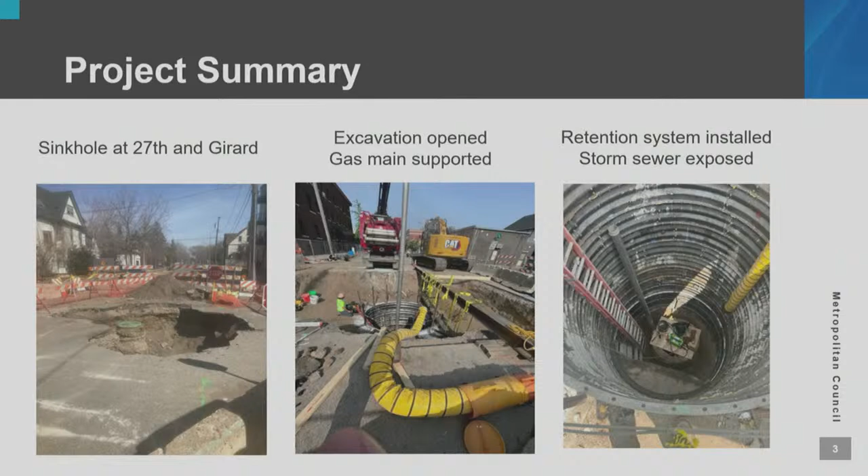Once that concrete saddle was poured and cured, we were able to construct a fiberglass manhole on top of that pipe, supported by that saddle. Then we backfilled to the elevation where the city's sanitary sewer connection was located, about 16 feet below ground.

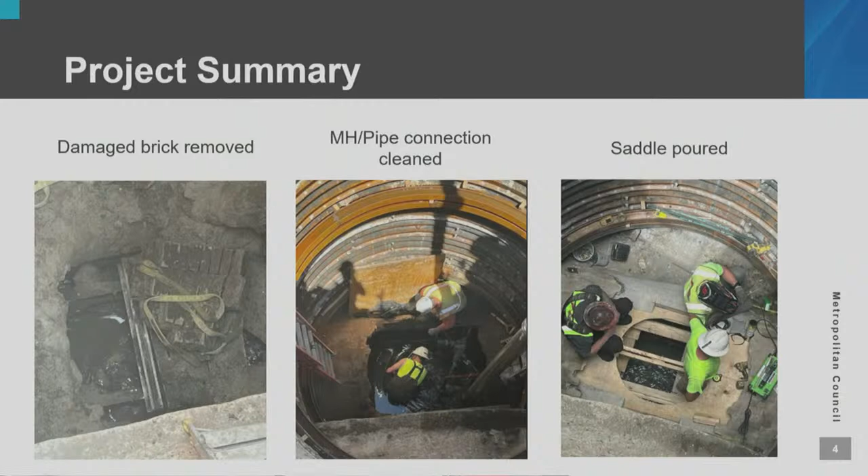To summarize the repair scope and the estimate, the work includes engineering services to support the repair work. We needed people to design the manhole itself to support traffic loads, and a structural engineer to design the reinforcement for the concrete saddle that was placed. We were also looking for costs for excavation and the maintenance hole structure itself, and reconstruction of the maintenance hole.

Initially, we expected that the cost would be around $350,000, and that's what our initial emergency declaration covered. But as you could see from some of our pictures, there were a lot of other things we bumped into as we were putting this pipe into the ground, which increased the costs as we moved forward. Final total time and material costs for this project is approximately $430,000, so an additional $80,000 needs to be authorized to cover the actual costs of the emergency repairs.

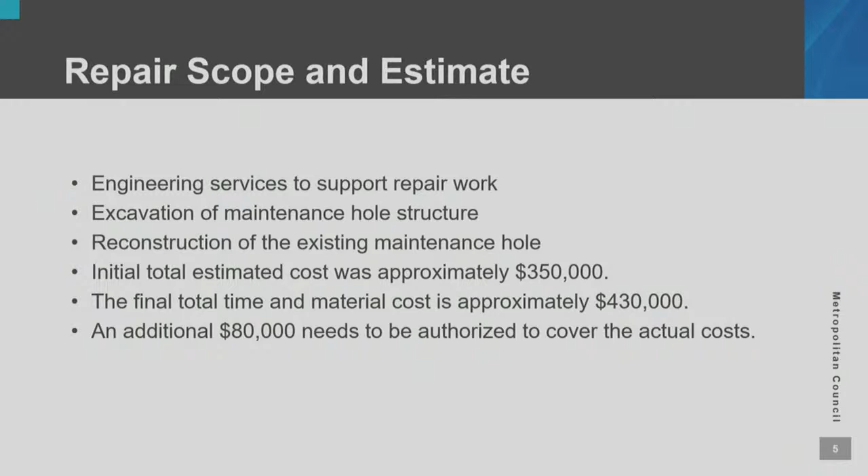Our proposed action is that the Metropolitan Council revise Emergency Declaration 2023-103 for the repairs of the maintenance hole for Interceptor 1MN330 at 27th Street West and Girard Avenue South in Minneapolis, from an estimated $350,000 to an amount not to exceed $430,000.

With that, I'm available for questions. Questions for Mr. Wedin? Yes, please.

Thank you, Mr. Chair. I know whenever you start digging, you find surprises, so it's not surprising that you're coming back with an additional fund. Could you let us know how long it took time-wise from when it was first observed to completion? Because I know it's very complex with that gas line there and the storm sewer, and you have to be so careful with everything. I think it looks like you guys did a fantastic job, but just the total time it took.

Mr. Chair and council members, as I recall, the initial emergency declaration was issued around April or May of this year. That's about when we issued that initial emergency declaration, in the spring of the year. Looking through records, I was seeing work still being completed in about August of this year, so it did take us some time to get that repaired. Some of that is because of supply chain requirements—getting a new fiberglass manhole into that location takes time. It's not something we can get off a shelf somewhere; it had to be manufactured.

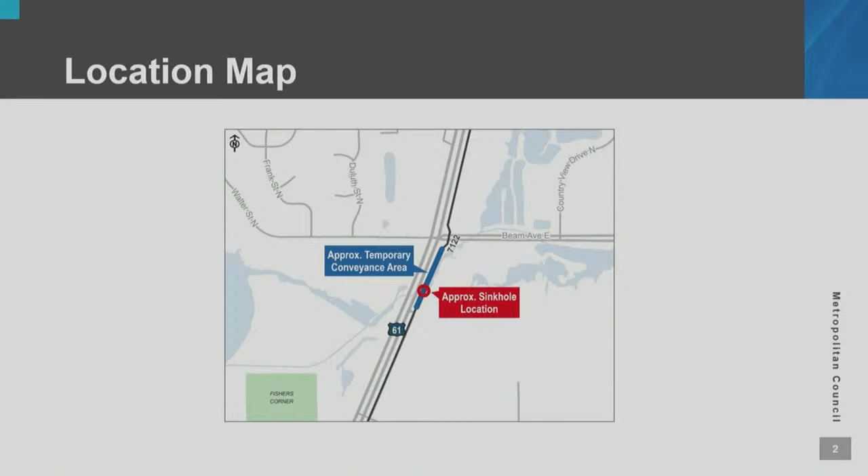Since then, we've televised and cleaned the pipe, and I was on the phone just an hour ago with crews. They've made a man entry into the low flow, or the low head crossing, and have been trying to locate where the hole is in the pipe. They've grouted above that hole to try to stop the inflow of more groundwater and water into that hole. They've tried cleaning, but the top of the low flow structure is very badly corroded and they were unable to clean it much. The word I got back was their wire brush was actually going right through the pipe.

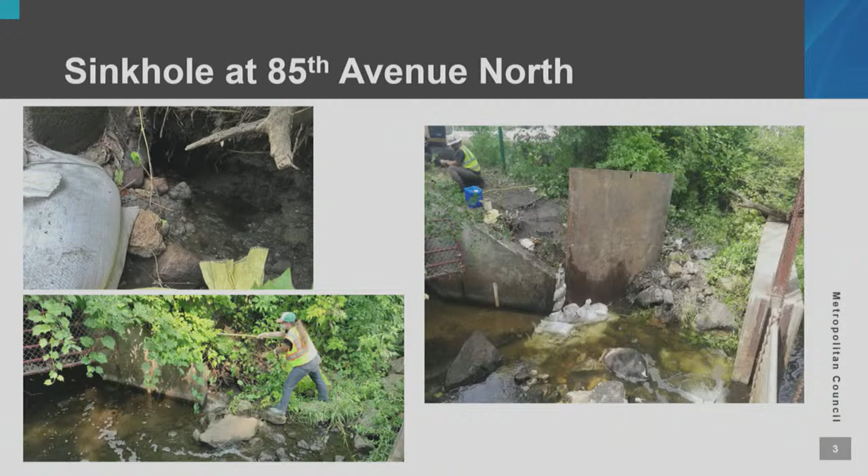One of the things about the cost, when we put together an emergency deck, we literally have hours to put that together. One of the things I recognized was that this pipe, which services the whole northeast region, all the way up to Forest Lake, we have about 4.5 million gallons a day on a dry weather flow, average flow that comes through the system.

So the temporary conveyance is not a small feat and would be costly. So we're going to try to repair the pipes while we have that item set up.

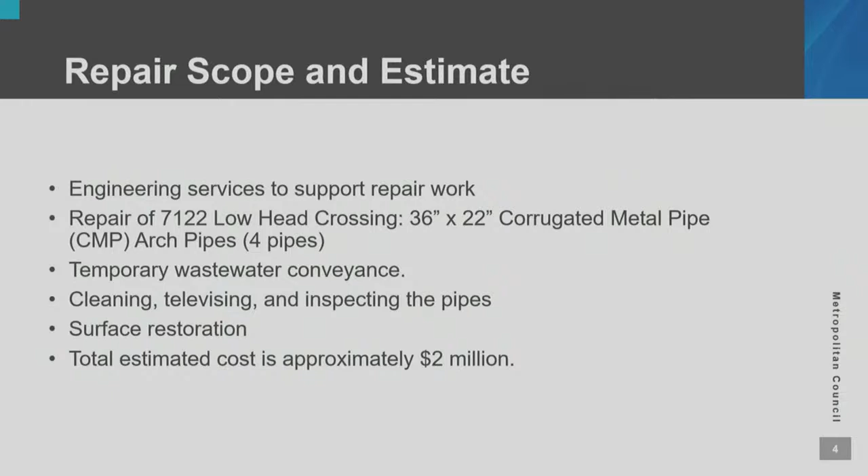And with that, our proposed action for tonight is that the Metropolitan Council ratify the attached emergency declaration for repairs of the sinkhole and Interceptor 7122 low head crossing in an amount not to exceed $2 million. And with that, I'm sure you'll have questions.

I have one. Does it make sense to do a cured in place on corrugated metal pipes that are almost 50 years old as opposed to just replacing them entirely? I don't know that cured in place, it kind of makes a new pipe in and of itself, but is that more cost effective? I imagine it's more cost effective than getting an entirely new pipe. But yeah, what do you think about that?

Mr. Chair, there's been many phone calls in the last 2 days to just talk about this particular subject, waiting to find out from field staff in particular just what the conditions of the pipe are, can the pipe persist until we get a capital project in place to do the full repair.

And hearing back that the crown of that pipe, and I wish I had pictures, I do have pictures now of the crown of the pipe, that it's perforated all the way through the length of the pipe, and there's water that's now seeping in other places other than the first sinkhole that we have. The fact that they can basically peel it away with a wire brush, meaning that it's basically soils and the culvert above that are holding everything up in the air.

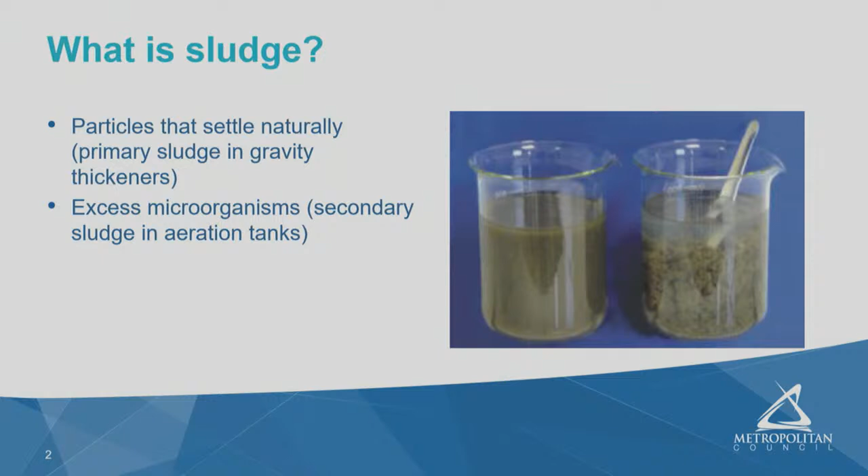I work in process engineering, R&D, and air quality under operations support services. Polymer is used as a conditioning chemical to treat the sludge generated at a wastewater plant. Sludge is the word for the solids generated at a wastewater plant. Sludge at Empire comes from 2 sources: primary sludge, when the raw wastewater is allowed to settle and solids settle out, and secondary sludge, where we waste a certain amount of microorganisms continuously to maintain a healthy biological population to remove nutrients in our activated sludge aeration tanks.

Polymer is mixed with that sludge, and the picture shows the beaker on your left is sludge without polymer, kind of evenly mixed in there with the solids. The picture on the right is polymer mixed with that sludge, and you can see the water starting to form on the top and sludge starting to settle on the bottom.

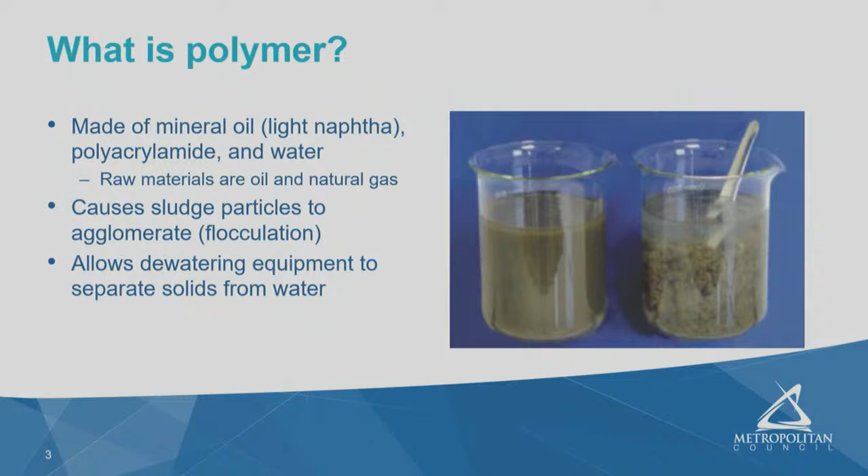The product that we would be purchasing is made of mineral oil, polyacrylamide, and water in a liquid emulsion. It causes the solid particles to stick together, or flocculate, and then the water can more easily separate out.

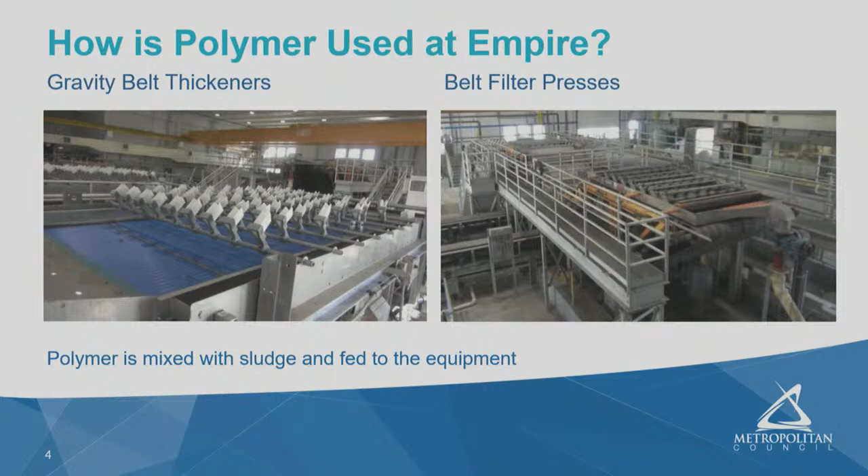We use this polymer on two different pieces of solids processing equipment: the gravity belt thickeners and the belt filter presses. These are mechanical sludge treatment equipment, and the same polymer is used for both.

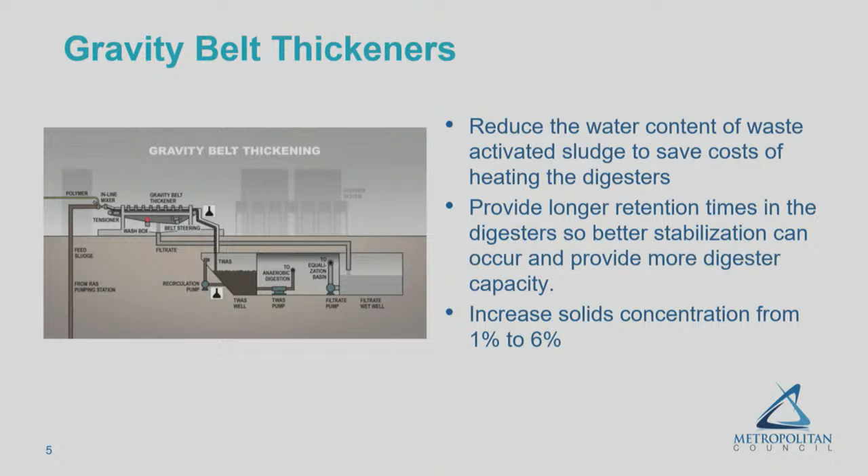For the gravity belt thickeners, here's an illustration of how it works. This is used on waste-activated sludge, those microorganisms, and the sludge gets mixed with polymer and then fed onto a moving belt. The water flows down through the belt and the sludge stays on top, getting thicker and thicker until it's at a concentration of about 6% solids, where it's appropriate to be sent to anaerobic digestion. Then it's called thickened waste-activated sludge, or TWAS.

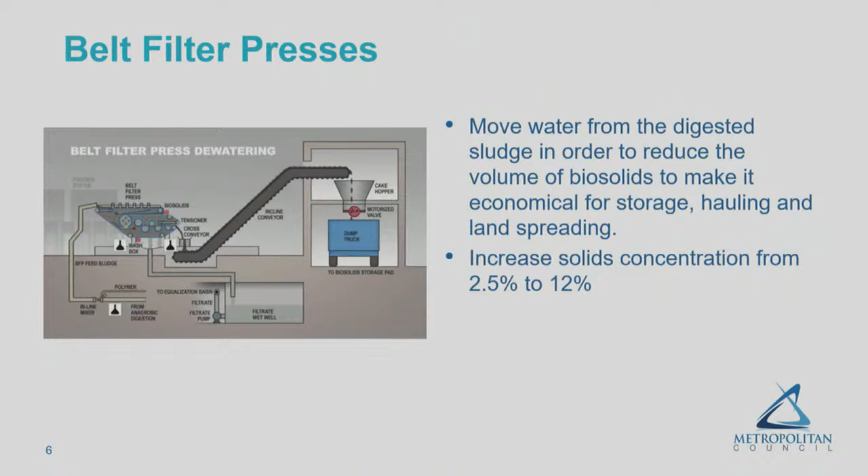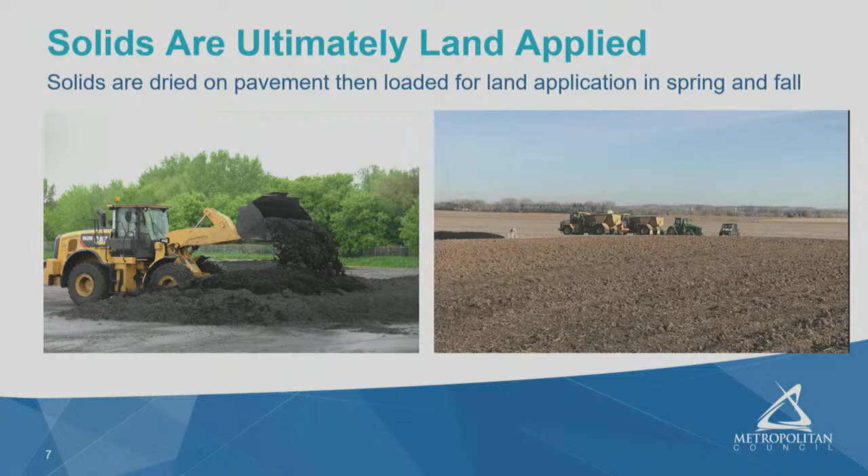At the Empire plant, solids are ultimately land applied. First they're sent to a pad where they can dry a little bit more outside, and then they are land applied on agricultural fields.

To procure this chemical, we went through a two-step process. First, we did an invitation for pre-qualification starting in December, allowing manufacturers to bring their chemical and test it full scale on these pieces of equipment. The products that met our specifications and worked well with the equipment were allowed to bid.

We put out the invitation for bids on July 10th and received bids from 3 different companies, which were opened on August 10th. Polydyne Inc. was determined to be the lowest responsive, responsible bidder and met qualifications.

So over 5 years, we expect to spend about $2.4 million on polymer. The Office of Equity and Equal Opportunity did not set an MCUB goal for this contract.

The proposed action is that the Metropolitan Council authorize the regional administrator to award and execute contract 22P349A with Polydyne Inc. to provide polymer to the Empire Wastewater Treatment Plant in an amount not to exceed $2,399,000.

Thanks. Thank you. Questions for Ms. Schrandt? Please. Thank you, Mr. Chair. I thought it was really interesting that you let them come in and actually test their chemicals on the plant, because, wow, that's such a great idea to do that.

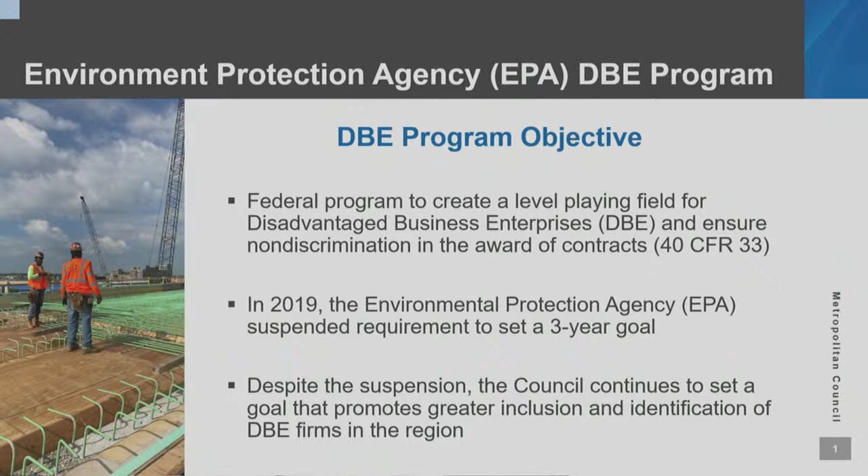As background, the federal program to create a level playing field for disadvantaged business enterprises is called the Disadvantaged Business Enterprise Program. In 2019, the Environmental Protection Agency suspended the requirement to set a 3-year goal. However, in the interest of transparency, accountability, and consistency, we operate our EPA DBE goal in accordance with 49 CFR Part 26, the same regulations that govern our FTA DBE goal. The overall goal represents the anticipated DBE participation based on projected expenditures over a 3-year period, and it is applied and measured each fiscal year. The overall goal is not a quota - it's a goal, and we do our best efforts to meet it each year.

One requirement of the goal methodology is that the maximum feasible portion must be achieved using race and gender neutral means - meaning instances where you don't establish a goal on a project. We count race and gender neutral participation where there is no goal established on a project but we still get DBE participation, and also on projects where we have established a goal but achieve a higher percentage than required to meet it.

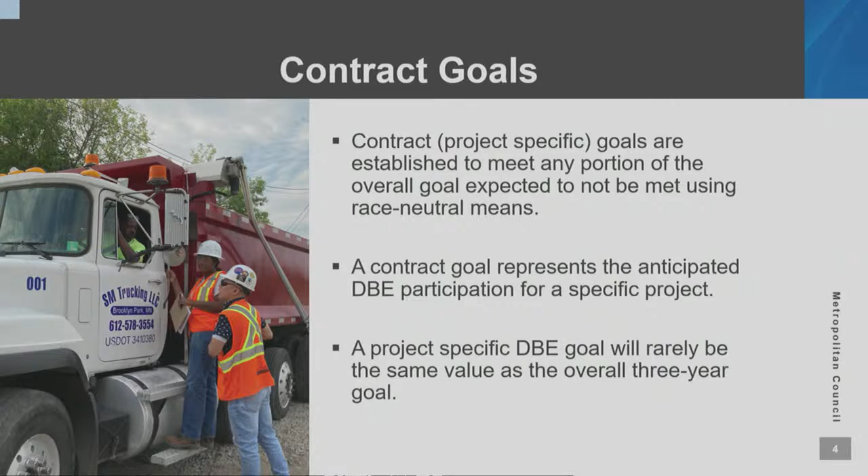The mechanisms we utilize to achieve our overall goal include setting contract-specific goals, and we have contract specifications that outline the process of how we do that, how we measure, and how we count it. A project goal is probably rarely or never equal to the overall goal because it is project-specific and based on those factors and availability of DBEs to do the work.

So the proposed goal for our next 3 years, 2024 through 2026, is 11.9%, with a race-conscious portion being 5.4% and a race and gender-neutral portion being 6.5%. What jumps out, other than the overall goal, is that it's rare to see the race and gender-neutral portion higher than the race-conscious portion. However, that is due to a couple of factors - we had a high percentage of projects where we got race and gender-neutral participation, either where we didn't set a goal but still achieved DBE participation, or DBE participation that exceeded the established goal.

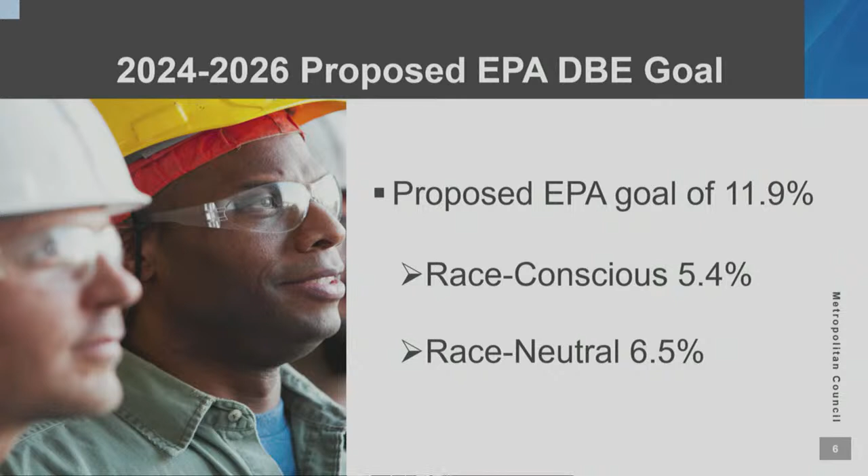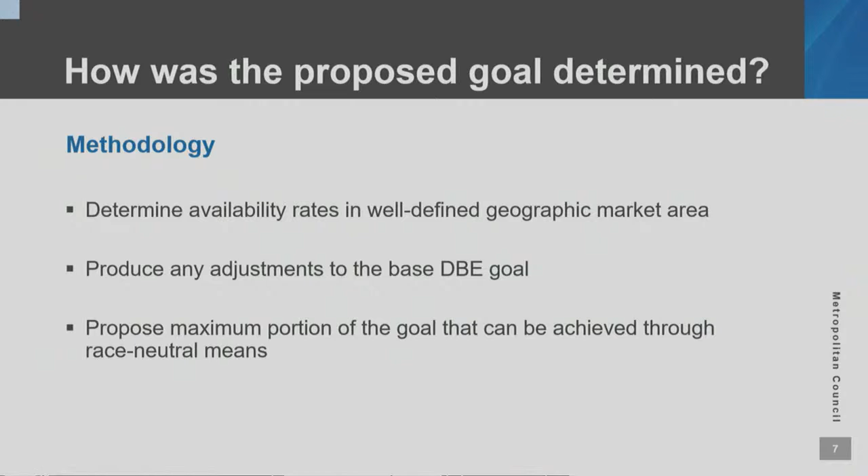So the methodology used is you have to determine the availability rates in a well-defined geographic market area, and then produce any adjustments to the base DBE goal, and propose the maximum proportion that can be achieved using race and gender neutral methods. This is the first time in the council's history we used a third-party outside consultant to conduct our methodology. This creates a level of objectivity and transparency, and we received feedback from the vendor community and our equity advisory committee that this is a best practice.

One of the things they were concerned about was the limited amount of data in some of these proposed methods. Using the 5 methods would compute a goal of 25.6%, including the adjustment and historical data. Ultimately, we chose option number 4, utilizing the 3 methods with the adjustment, due to the limited amount of data and information from the other 2 methods.

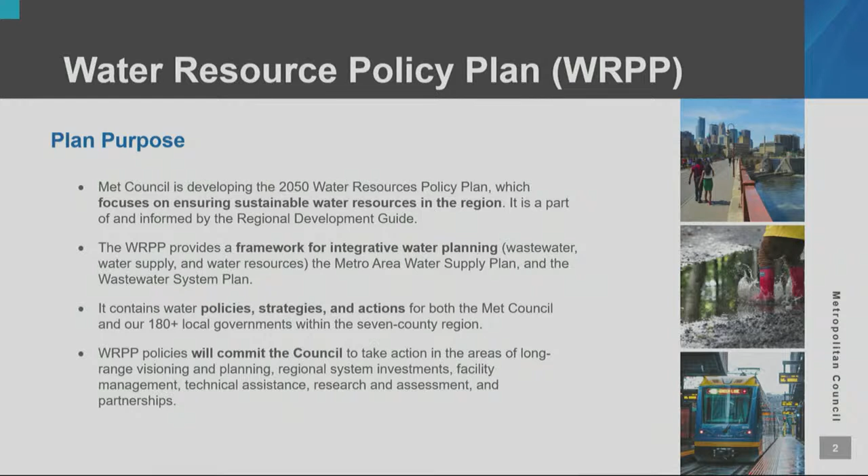This plan will commit the council to take action in the areas of long-range visioning and planning, regional system investments, facility management, technical assistance, research and assessment, and partnership. So there's a lot in there.

I do want to give a little insight into when the authoring teams create the papers, we also share them with our water advisory group, which is an advisory group made of 21 local water professionals from the region. We have 7 focused more on the municipal wastewater system, 7 members focused more on regional water supply, and then 7 watershed administrators. With their help and input, that helps to guide the contents of our papers.

I want to reassure you and frame that we are doing engagement with these papers. When you read these papers, it is a lot of what the council's perspective is, but we have engaged with locals to ensure that we're bringing some of that local perspective through.

That being said, these are papers that are to start discussion. And even with those 21 advisors, we still miss things. So that's why we're coming to you to get your perspective and to engage with that discussion as well. Pushing it all into one box is just not fair to the process, so I wanted to share a little bit more insight into what that process was.

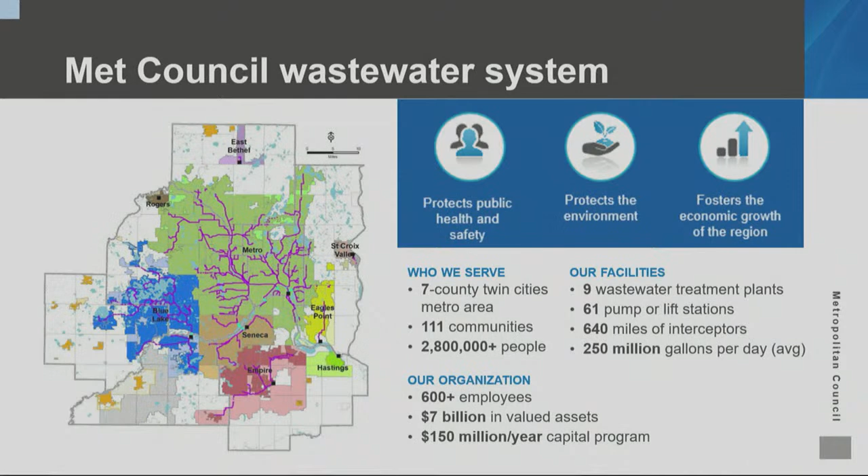There are many topics are you laughing at our slide?

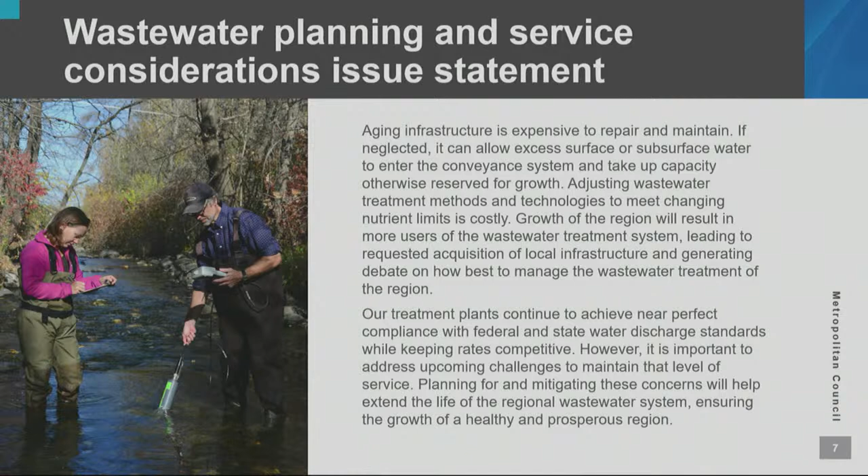There's a lot of topics we could discuss regarding wastewater planning and service considerations. We have our issue statement on the screen. I won't read it, it's quite long, but some of the topics it addresses include aging infrastructure, wastewater treatment for various contaminants, system capacity, and how we plan for growth. You can reference this at another time.

These key messages are really important, and we wrote these after writing the paper as kind of the highlights and blurbs that summarize our commitments and what's in this paper. I won't read them, but I do ask that after the meeting you read them and share them, because these are our goals for this paper.

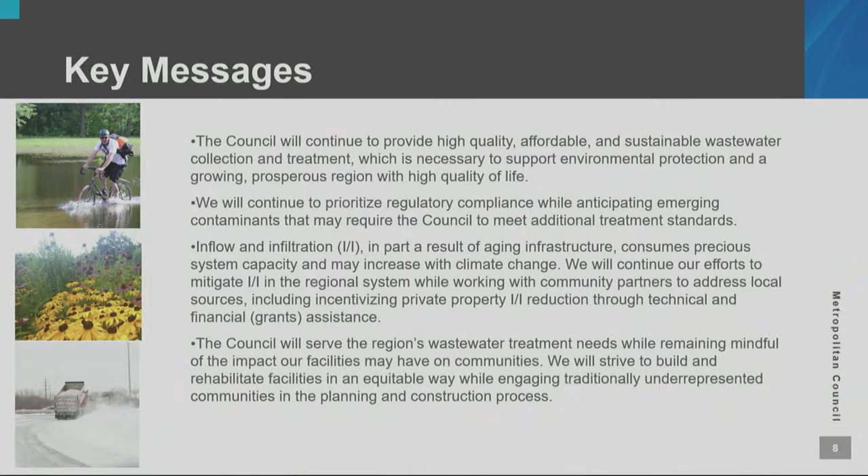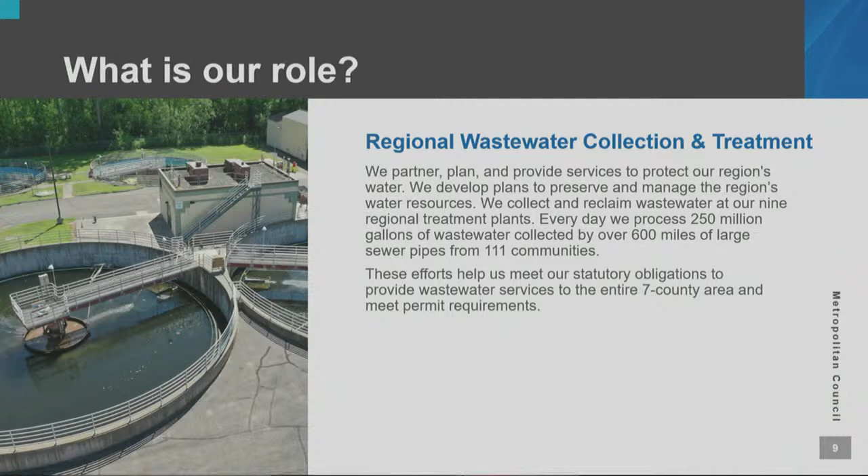Our role in regional wastewater collection and treatment, I mentioned this earlier, but wastewater treatment is addressed in council statute. So we partner, plan, and provide services to protect our region's water, and we preserve and manage water resources, collect and reclaim wastewater, all to serve our region and meet our statutory obligations.

Now into the key issues of this paper. We highlighted 7 issues. It's not an exhaustive list of concerns or considerations for the policy plan. As with all the other research paper topics, items not addressed in these papers are not excluded from being incorporated into the 2050 water policy plan.

I will start by just providing some details on a few of these issues, and then for more complete information, I'll direct you to the research paper.

As a quick refresher, inflow and infiltration is the clear water, so storm and groundwater that enters the wastewater conveyance and treatment system. It can enter from cracks or breaks in the sewer pipes as well as direct connections.

The Met Council and our local communities have invested millions of dollars into repair and rehabilitation of wastewater infrastructure to remove I&I from the system, and it has been successful. We've been able to defer capacity improvements estimated at $1 billion thanks to the hard work on I&I mitigation. The growth of the region has also been accommodated without needing system expansion because we are removing this clear water from the system. The low-hanging fruit of public infrastructure mitigation has been targeted over the years.

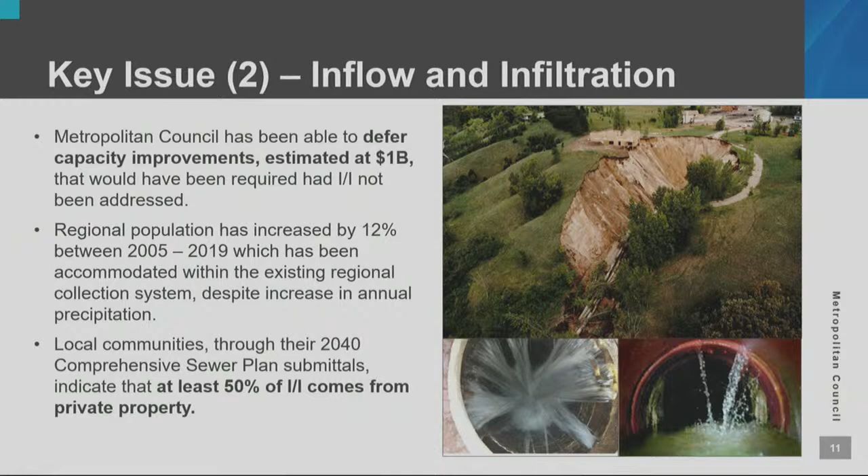Another issue I'd like to highlight that's in the paper is related to our liquid and Vactor waste receiving sites. As a quick definition, liquid waste includes domestic waste, so that's like septage, holding tank, portable toilets, grease trap, etc., and some industrial waste. And Vactor waste includes the solids that are removed from the sanitary sewer facilities, most often during cleaning operations. So Vactor waste has grit, sludge, fats, oils, grease, rags, etc.

So since then, we have heard concerns from liquid waste haulers about the decreasing number of sites. Vactor waste, on the other hand, can only be disposed of at the Metro plant in St. Paul. Concerns arise during flood conditions when the Metro plant is inaccessible.

So some implications of closed disposal sites include not meeting our customer needs for waste disposal and treatment, Vactor waste being disposed of in other areas of the collection system that aren't meant to handle that type of waste, and a need for environmental services to have agreements with other cities for disposal during flood conditions.

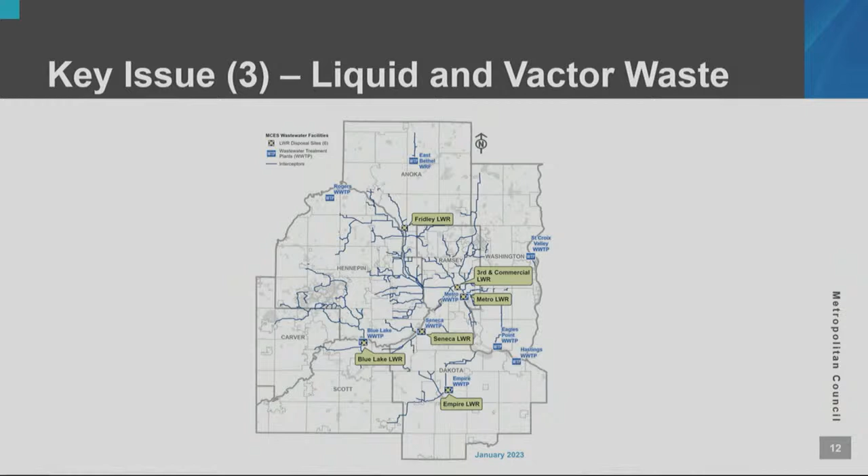Now into the new policies, I'll start with the new ones that we're recommending.

The first is wastewater surveillance, and this policy is that the Met Council will support efforts to investigate if or how environmental services can assist in wastewater surveillance in the interest of public health insights when the need arises and funding is available. The Met Council will continue to partner with public health agencies and remain aware of when the Met Council can provide insights.

This policy was recommended after our partnership with Minnesota Department of Health, University of Minnesota Medical School, and the University of Minnesota Genomics Center to better understand COVID-19. So this policy just shows that we are still willing to partner with our local agencies to protect public health.

Another new policy is related to contaminants of regulatory concern. I know there has been questions about this topic, and you'll get more information at another presentation. But I just want to highlight that this policy specifically focuses on the wastewater implications of contaminants of regulatory concern. So again, just high level, we'll continue to partner and engage in research.

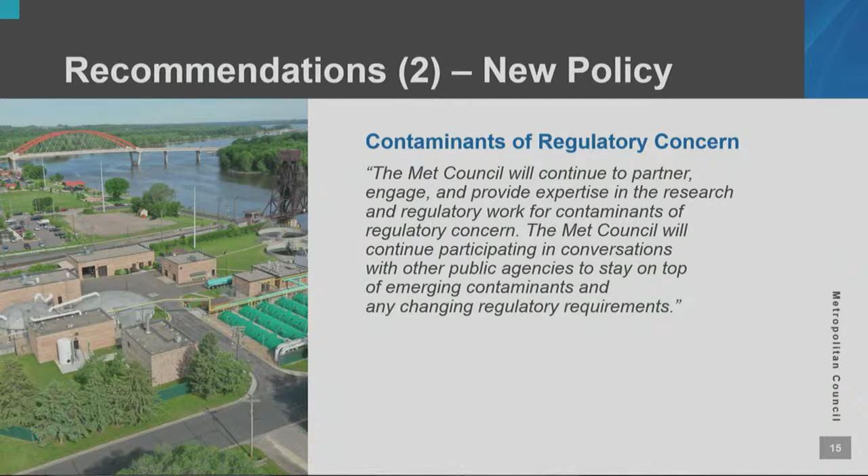A newish policy is actually a reinstated policy from the 2030 policy plan about Interceptor ownership transfer. We propose to bring this one back so that there is more clarity when the need arises for this policy. There is some criteria in the report, which is the same as what was in the 2030 policy plan, but we recommend bringing this one forward again just to have it available.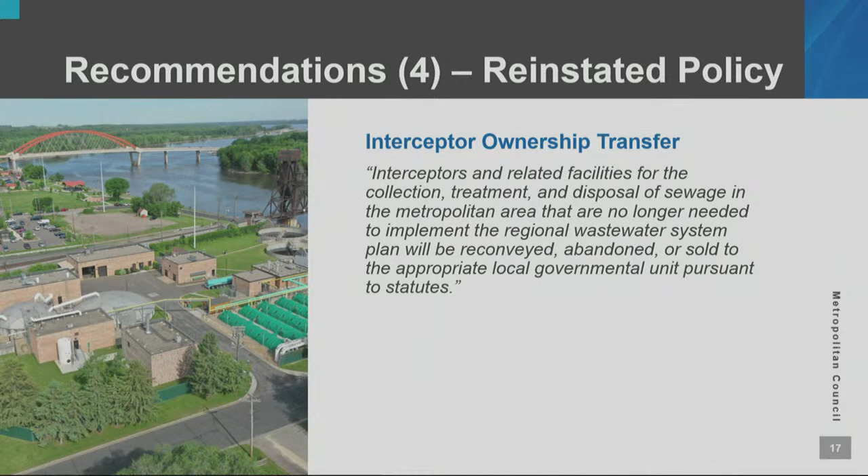All right, and I'm going to breeze through the last couple slides. They are how the wastewater paper impacts our current policy and any recommended changes.

So the first one is the water conservation and reuse. We are not recommending any changes from the wastewater perspective to this specific policy, but we do acknowledge and support that decreasing water consumption is an effective way to preserve or recapture hydraulic wastewater system capacity.

Next is our serving the rural area policy. We make decisions on rural wastewater service based on whether they provide a regional benefit. The previous policy used the word regional benefit. We chose to define what that means in the context of wastewater service.

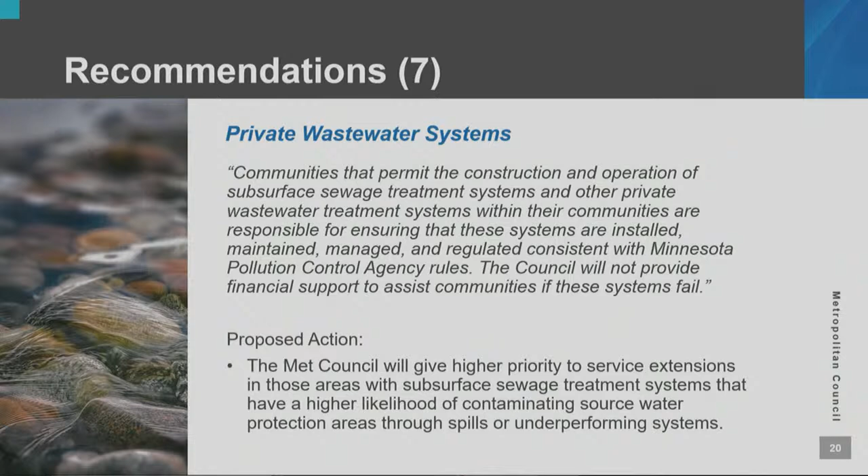And private wastewater systems, no changes, but we do have a proposed action that will be available for review. Similar with investment, no changes to the investment policy, but more implementation actions that we can pursue.

Almost done. Wastewater sustainability, again, no changes, but we do acknowledge that this might change as we will be taking direction from the Climate Action Work Plan in drafting the 2050 policies.

And our inflow and infiltration policy, the changes that we're adding are treatment systems into the policy language to acknowledge that the treatment systems are an area where inflow can enter our system.

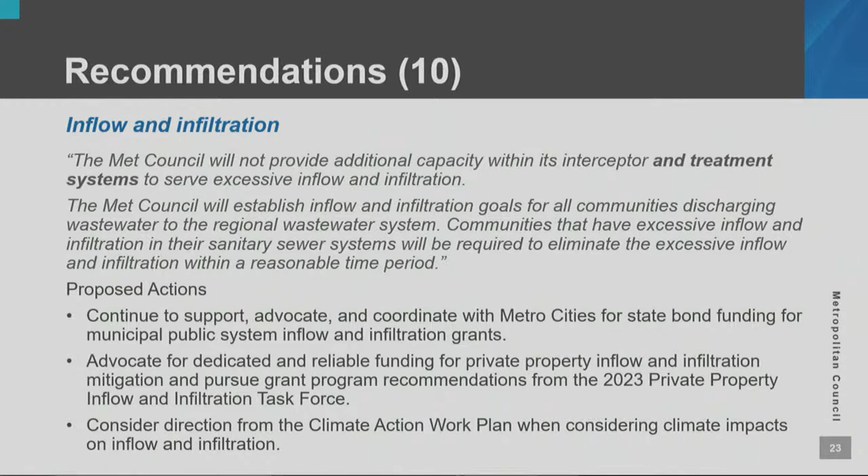And a few more recommendation actions or proposed actions for this policy. It includes more funding support, private property grant implementation, and again, the Climate Action Work Plan will guide some of those policy language or actions.

All right, last one, finance. Again, no changes from the wastewater perspective, but we do have some proposed actions to add and discuss this go around.

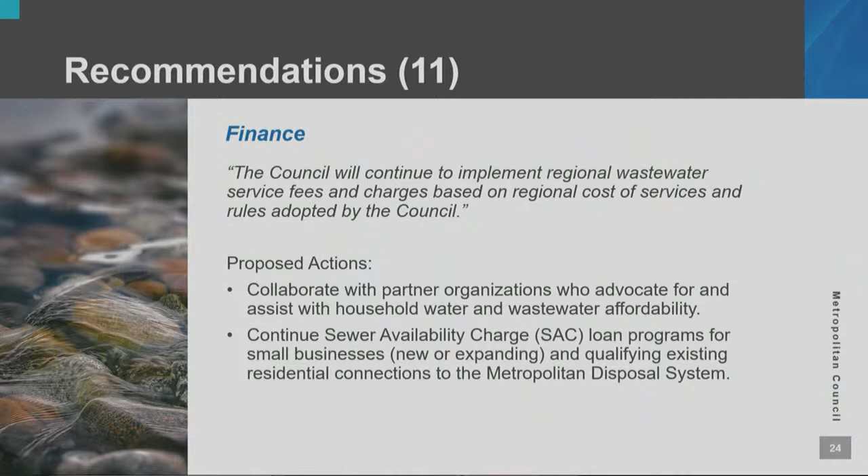So I did go through that fairly quickly. I can always flip back if anyone has questions or wants to read a slide. But now it's time for some discussion, wondering if you have questions, if we're missing anything, if anything is sticking out. Questions, thoughts, anything sticking out?

Yeah, go ahead. Thank you, Mr. Chair. The slide on the private wastewater systems, so, you're asking, have constituents raised concerns in your district?

And, I understand the not to provide financial support to assist communities if these systems fail because it's under MPCA, but I think it would be, I know you guys provide support, in guidance and technical support.

So it's just one of those things where maybe it's too stringent, saying will not provide financial support, which could be construed as no support. But I know they come to the district sector rep, so you do provide support to them with information.